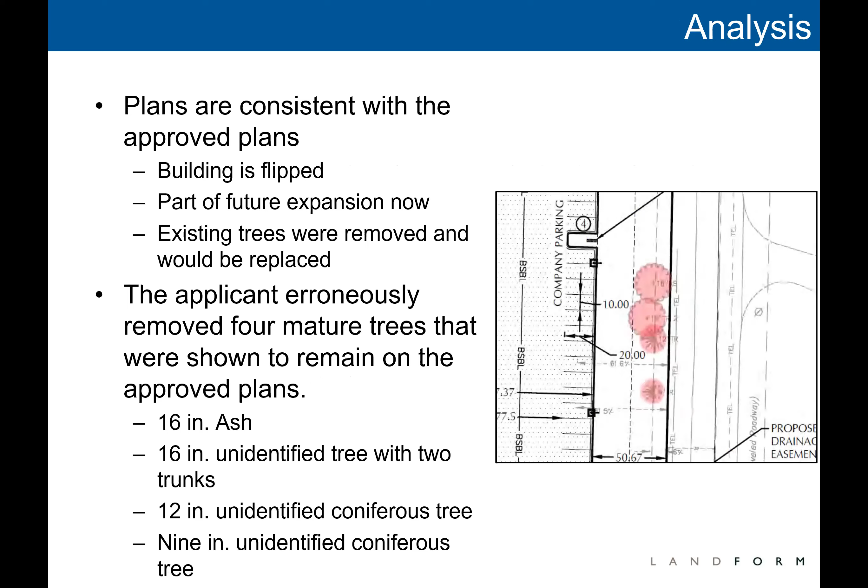I think they were significant enough — this is the old photo. Not all of these trees were supposed to be preserved, but 4 of them were, and you can see they're good sized trees that would provide some immediate screening. The applicant acknowledges that their contractor did remove the trees. We think it's important to replace those trees.

I spoke with one of the registered landscape architects on my staff about how to best do that. You simply can't bring in a tree that size and think it'll live — they don't do well that size. So we thought we should increase the number of trees, but still do bigger trees than we would typically require as part of a landscape plan.

In the original plans, the trees were planted pretty closely together along 101 already in the new proposal. So we suggest for the council to consider that some of the trees on 101 be moved to the north and west side of the building where these existing trees were removed and new trees will be planted. We would not lose any trees overall — all the landscaping originally approved would still be required, plus 6 additional larger trees and some additional shrubbery along 101.

We're pretty specific in our ordinance about how big those trees are and the spade needed to plant them — a 92-inch tree spade — so that they don't chintz out on getting the hole big enough and getting the trees in a way that they'll survive. That's a real trick when you're spading in bigger trees; sometimes they just don't do well. So we tried to be pretty specific.

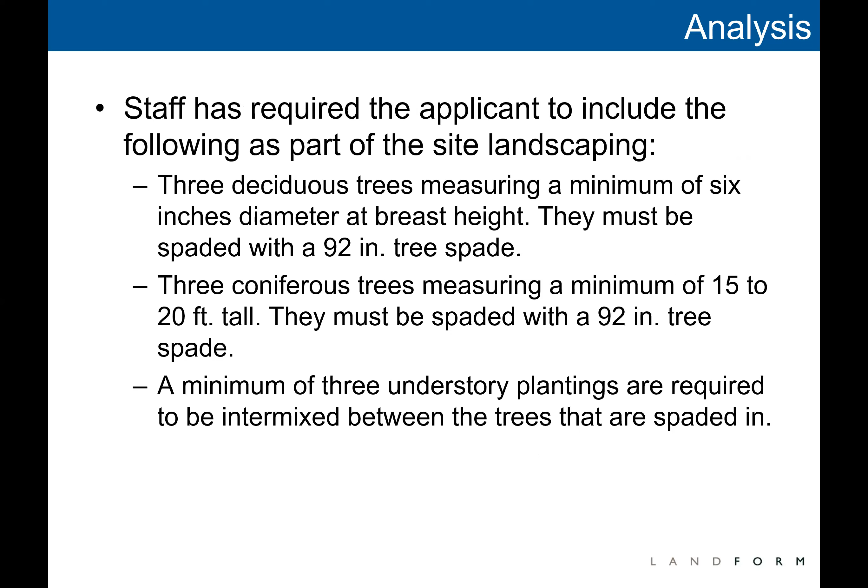And so we want to give them room to thrive and grow, and eventually we'll provide screening more closely relating to what was removed. So certainly the council can talk about that. We think that's a good solution to provide replacement trees as well as give them room to grow and provide a little more screening on the north and the west. So certainly open to modifications from the council, but that is our recommendation.

We do recommend approval of the site plan amendment, which is a 3,000 square foot addition to the approved building, flipping the building to put the retail on the north end, and then correcting the landscape situation. Happy to answer any questions.

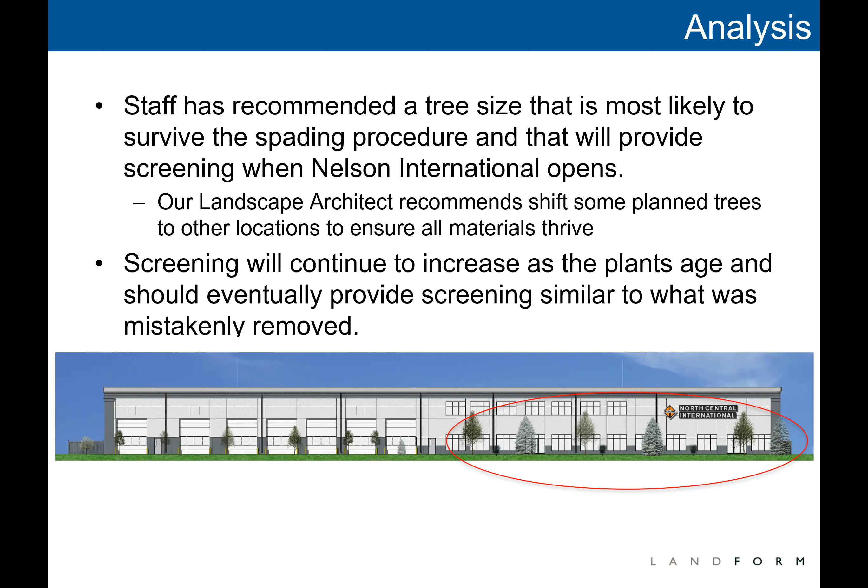And how about the screening to the south? I know there's a lot mentioned about the north and west and moving some trees over there. What is in the plans currently in terms of screening, because the majority of the houses are to the south and to the west of the surrounding properties.

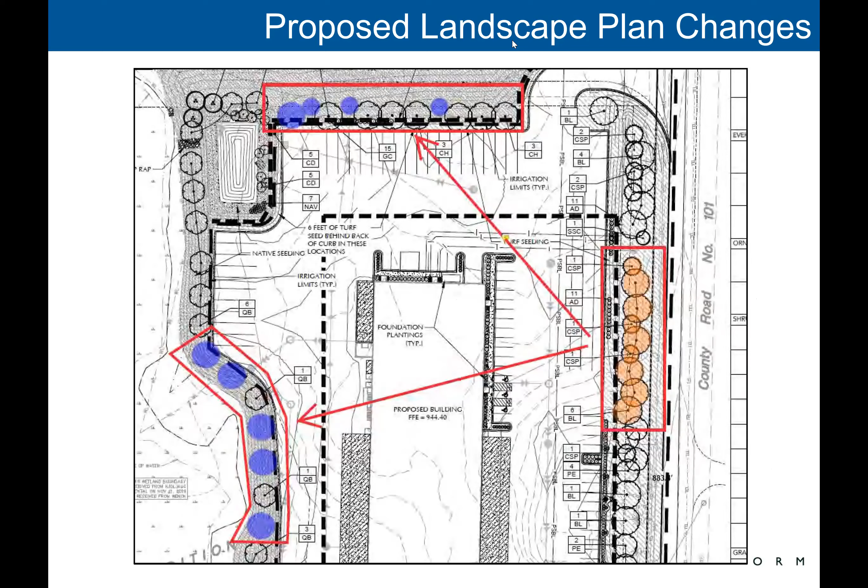Yeah, the approved landscape plan - I'm going to stop my screen share and pull that up for you here quickly. Just appreciate it, get to the screen. Here we go, and share the screen.

While you're working, Kendra, is the orientation of the building actually rotating? Like, is the long axis pointed in another direction, or is it just the design of the building that's changed within the existing shape orientation?

The shape orientation is staying the same, it's just flipping north to south. So this retail space was down here, but it remains this more vertical orientation.

This landscape plan is the approved landscape plan, it doesn't reflect some of our changes where we said we think maybe move some of those trees. So along the south, we do have a city trunk infrastructure line, so we're balancing that with the landscaping, but we do have a row of 7 trees along the south property line there.

Okay, in terms of the parking lot, does that change at all with this new plan? Well, it did change because the perimeter parking remains the same, but what changed is the parking was always in front of the retail. So when the retail component was here, this parking here was down here.

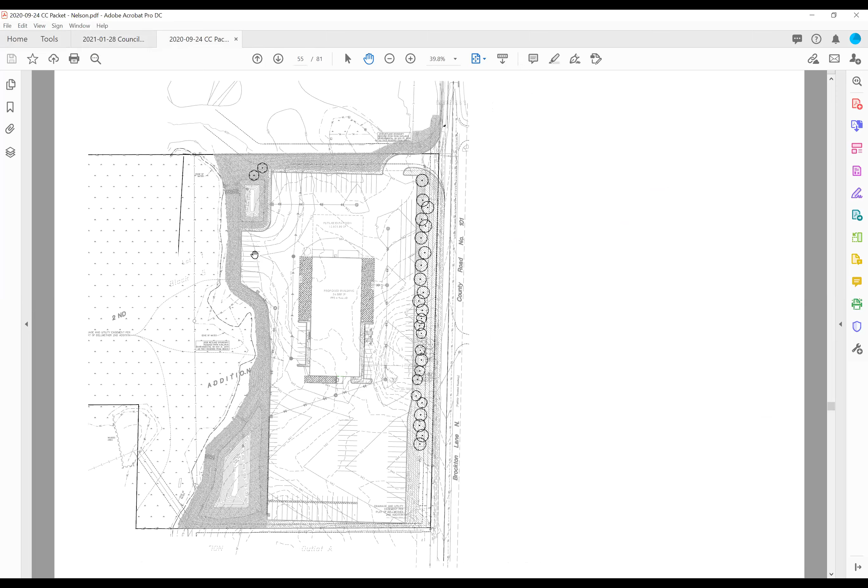If you look at the new north line of the building proposed right here, that extended out here. So the addition really did tend to come out to this end where the addition was planned. But you're correct, the future addition on the south that they're showing moves the south building line from this point slightly further south. The difference between this basically stayed the same, and they added on to the north, and the future expansion now would be on the south. So it would creep closer, the building wall, to the south.

And this, just as a note, this isn't Bellwether. This is a commercial lot for Bellwether. The residential is over here, these are residential lots in Bellwether over here. But yes, you're correct, the change to the expansion would ultimately, if built, bring the building closer to the south lot line.

Gotcha, and a couple of the parking stalls got added in this area. I apologize, I would have to highlight these and match them up to see exactly, but I can see that some of the stalls happened in this area. Is the applicant on? Can he talk about it?

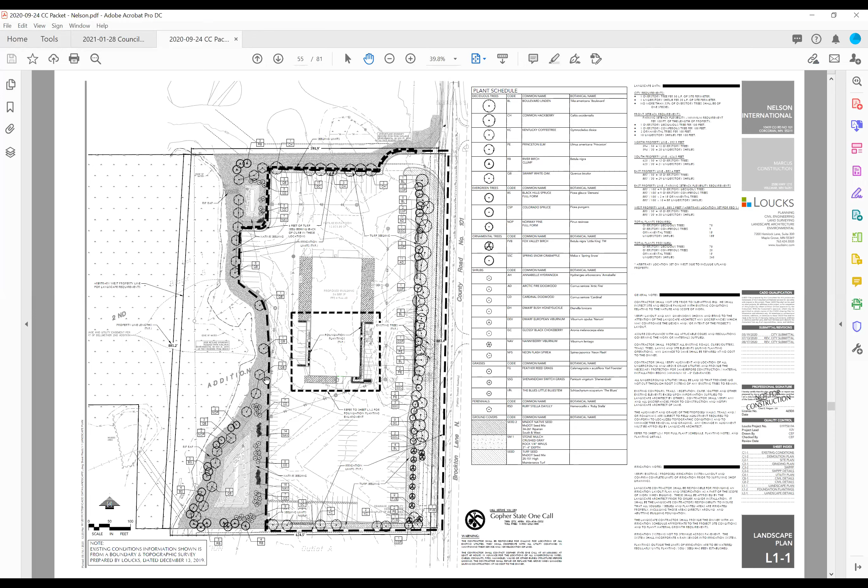Okay, Mr. Mayor and council members, this is Ryan Nelson. We're at Marcus here with a couple of people involved with the project. We're a little confused about the parking stall thing because we really didn't add much for stalls, except maybe a couple around the building that we're aware of. So we don't feel we added much.

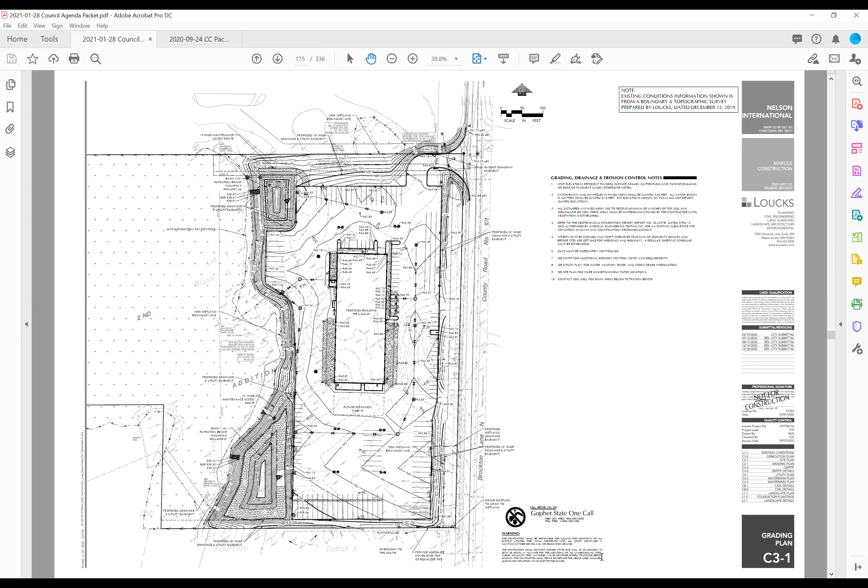Around the perimeter is the same, and we actually lost a little bit on the west side, kind of towards the northwest by the pond. We lost a couple in that corner, but that's truck parking stalls. There might be a few more automotive stalls, but that's what we added there.

And since we're on, if you guys have any other questions about why we flipped the building — we desired to do that because of traffic flow on the site. Once we found out what our driveway entrance and our future driveway entrance will look like, we decided it would flow better with the building switched around.

Once we switched the building around, it was more difficult to add on to the parts storage side of the building. So we decided to expand the size a little bit to make the parts warehouse larger now, knowing that in the future there's probably no option to add on to that area. So that was kind of the main driver with the changes we're asking for.

So did you add an actual showroom too? Yeah, we made the showroom larger. Okay, there's always been a showroom though. There's always been one, we just made it larger, and the inside layout of the building has changed a fair amount on the retail end of it.

Yeah, I didn't remember the showroom with the door on the outside. I'm assuming that's to bring a truck in for show. Yes, that's to bring a vehicle in, because once we switched it around, we were going to have this fairly large empty space. We thought, can we add a door and put a vehicle inside? And that was what we were able to accommodate.

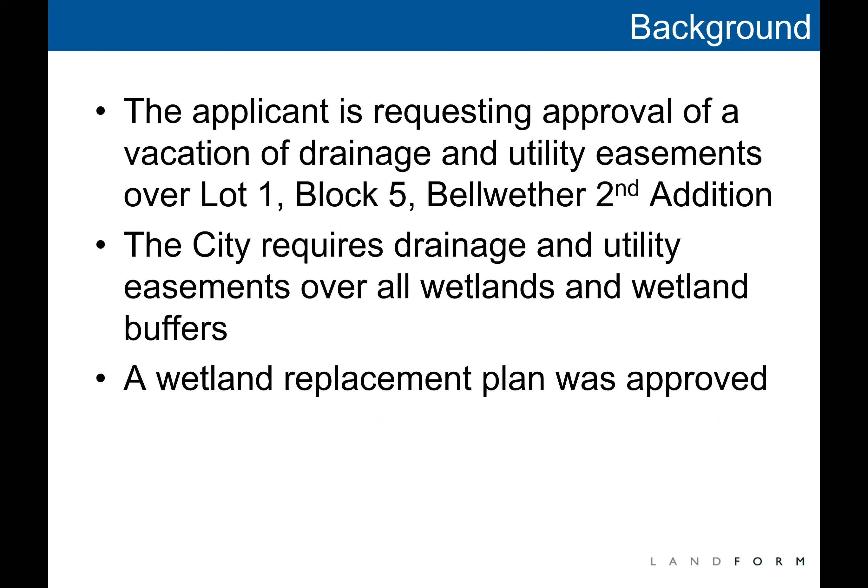To vacate the drainage and utility easement on the back half of lot 1, block 5, Bellwether Second. We always require wetland, drainage and utility easements over wetlands. As part of this project, this large wetland here, which had a drainage and utility easement deeded with Bellwether, the applicant was able to modify the eastern boundary of that wetland.

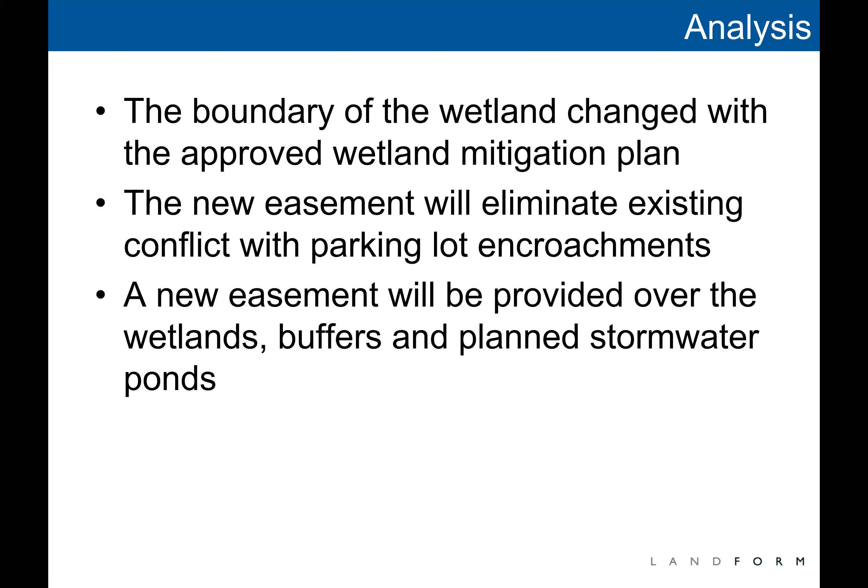And so we had requested that they vacate that easement so that there wasn't an encroachment of the parking lot into the easement. So this is the existing easement, and there was a tiny bit right here that they were authorized to fill and build the parking lot over.

So we would vacate this easement that was deeded with Bellwether and get this new larger easement as part of this plat, which would cover the edge of the wetland boundary and the stormwater ponds in these two locations. So that would be part of the site plan approval, that was a contingency on the resolution you just approved.

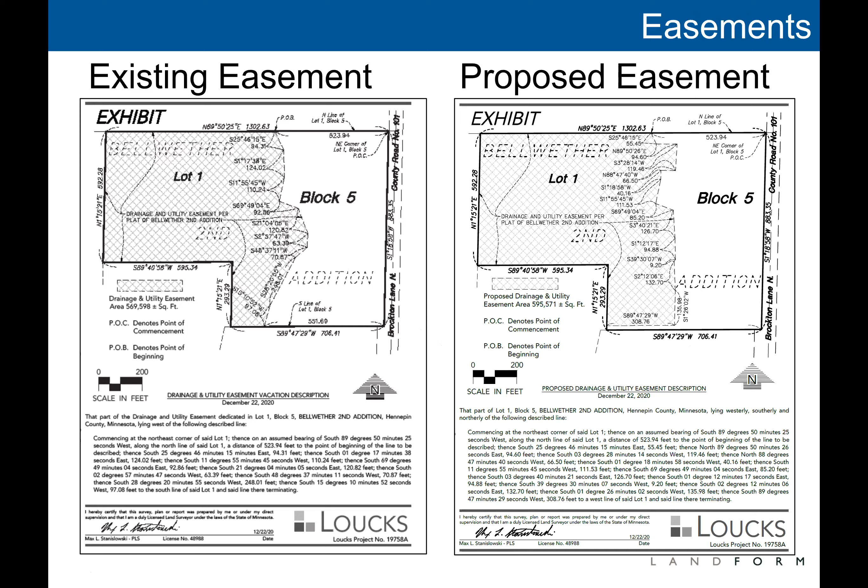But again, approval of an easement vacation requires a four-fifths vote. So tonight we would just ask that you open the public hearing and then continue it to a date certain for this item.

Thank you, Kendra. So yeah, we will open the public hearing, and Jessica, if anyone wants to speak, raise your hand or press star 9, and Jessica will acknowledge you. Thank you, Mayor. No one is raising their hand at the moment, but we could give them a moment. Sure, let's give it a few more seconds.

Mayor and Council, just looking at the upcoming agendas, I would recommend the February 11th meeting. The February 25th meeting is pretty jam-packed, although it should be a quick item, but one less item. Sounds good, and do you just need a motion on that to push it out to that meeting? If we could get a motion, that'd be great. All right, I'll entertain a motion to continue and table this till the February 11th meeting.

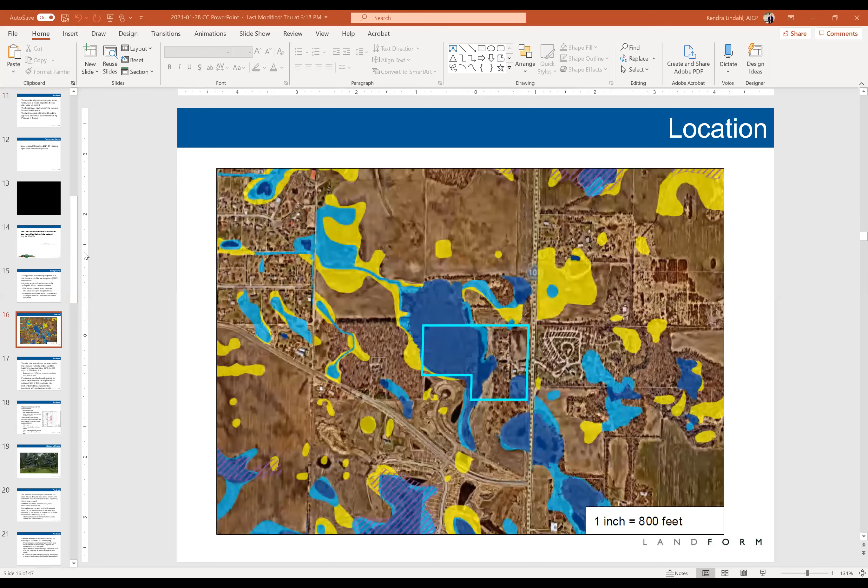Then we will move on to item 8B. I'm sorry, that is what we just did. One second here, I apologize, I have my notes backwards.

Item 8C, which is the PUD sketch plan review for the Van Blaricom and Schober properties.

Thank you, Mr. Mayor. This is an opportunity requested by the applicant to solicit informal comments on a PUD sketch plan. The comments tonight are non-binding, but are really important for the applicant to be able to make decisions about investments. The PUD sketch plan is for 193 single-family homes.

121 of those units would be an extension and infill of the Bellwether development, which is villa homes with association maintenance. The western 72 units would be new single-family housing not part of the Bellwether project. On the screen is the Van Blaricom property, and the Schober property is surrounded by the Bellwether project, south of Stieg Road.

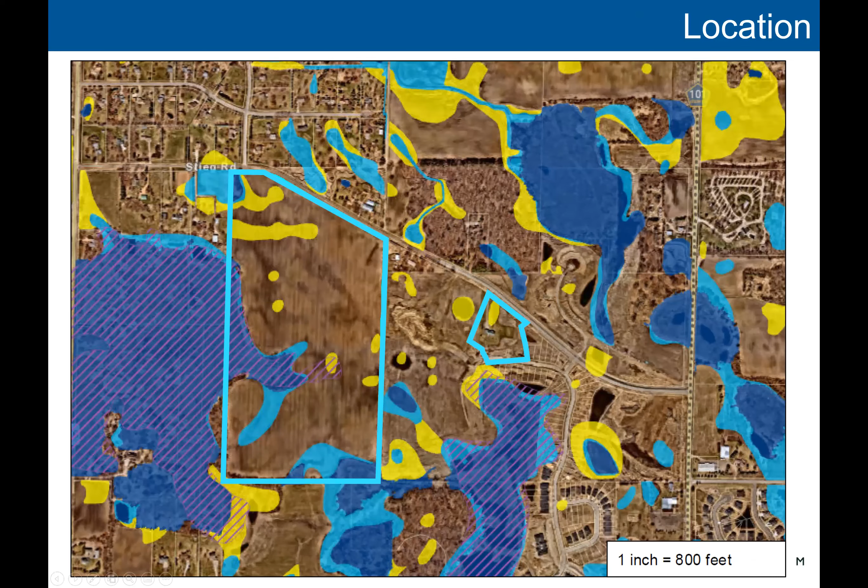The concept would expand the Bellwether project. An EAW was performed when the Bellwether project was proposed back in 2018. The Environmental Quality Board state rules have thresholds for mandatory EAWs, and Bellwether did meet that threshold. The new project does not meet the threshold for a new EAW, and when combined with the existing Bellwether, does not meet the threshold for a new EIS.

As I said in the staff report, I worked with our city engineer to review the rules, which guidance is not crystal clear on the process. I did speak to EQB staff who noted that the city is the RGU and has broad discretion in how to proceed. Our recommendation remains as outlined in the staff report.

This does not trigger an EAW, but we do recommend that as part of the feasibility study required to review infrastructure improvements, we do a memo, as we've done on other projects for similar situations, to review this new portion of the project against the adopted EAW, meaning permits identified as required in the EAW. We would measure against this project and apply the same mitigation strategies. I have reviewed this with the EQB who has no objection to that approach.

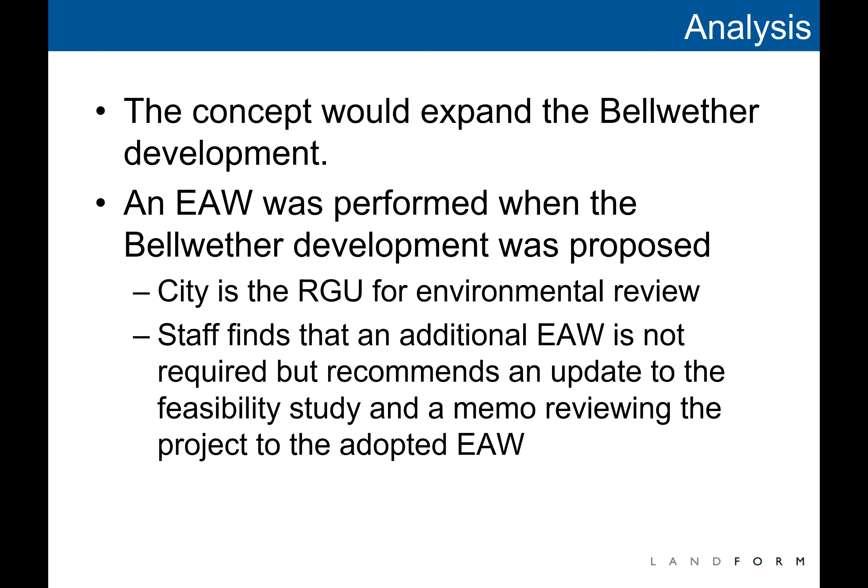And the rules, they've noted that the rules should provide a bit more guidance when they update the rules next time. This exhibit shows the new concept. Here are some new villa homes on the Schober property, which would tie in. This is the entrance off of existing entrance off of Stieg.

So this is a new villas here. The road would be extended and continue around the park with these villa units. On the northwest, there are the 72 single family homes that are not connected to the project, and Pulte is intentional about that.

These folks in the villas have association maintenance. They're part of the clubhouse. These would be a different single family neighborhood, not paying association dues and being part of that association.

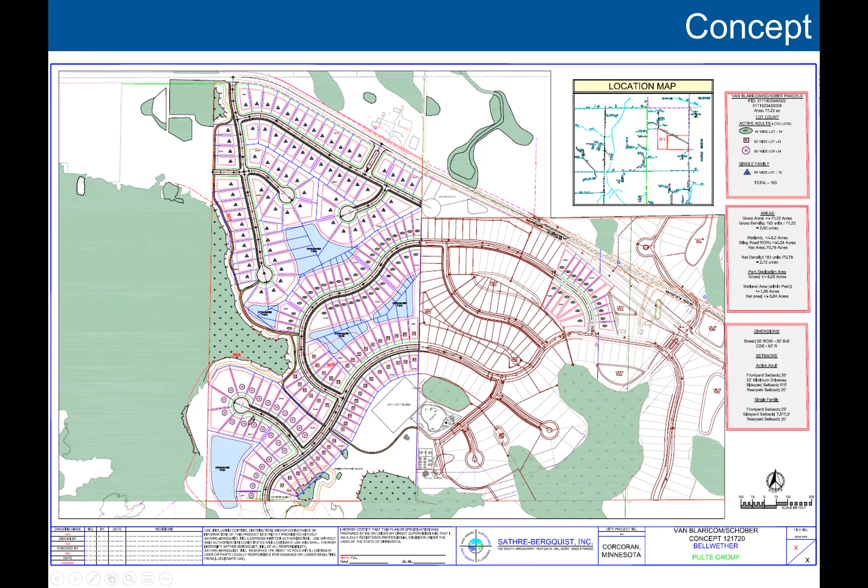Their concept would be to rezone the villa portion that's going to be an extension of Bellwether as PUD, subject to all the Bellwether PUD standards, and then rezone the single family to RSF3, which is 7,500 square foot minimum lot size with 65-foot lots. At this point, they do not believe they need a PUD for their single family and would follow straight zoning standards for that portion of the project.

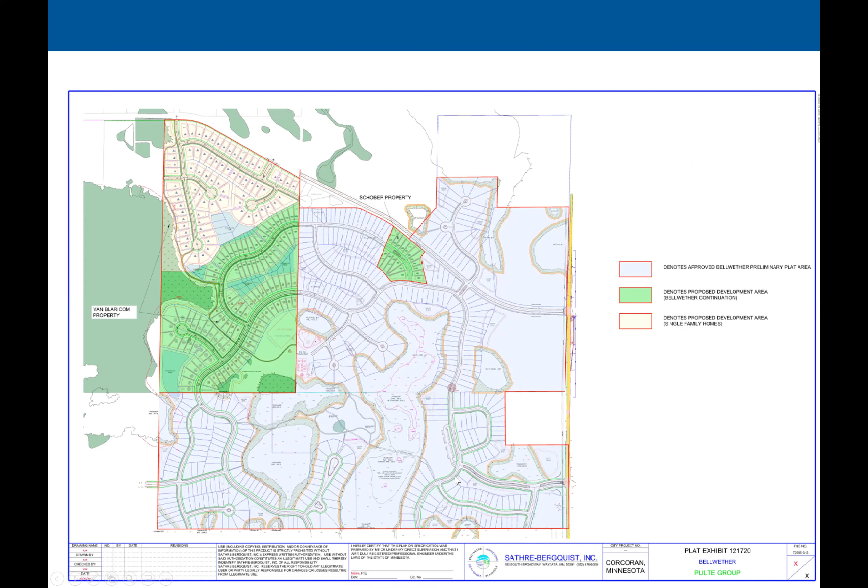The villa homes will follow the same architectural standards as Bellwether if it proceeds. The single family homes are more traditional single family homes, slightly larger. We have not reviewed this for compliance with our ordinance standards, but generally appear to be consistent with the standard zoning requirements.

One of the issues that needs to be resolved for this project is when Bellwether was approved, we needed to reach agreement with Maple Grove for them to provide water to the site. The agreement with Maple Grove as it exists approved water service for the Bellwether project that has already been approved. So we would need to amend that agreement with Maple Grove in order to expand that water service to serve these properties. Pulte has been speaking with Maple Grove, as has city staff, and the city of Maple Grove has indicated a willingness to work towards expanding that agreement.

Additionally, what's new since 2018 is the city has been moving forward with the new well studies. A new well site has been identified on the Lother property, and this park in this project has been identified as a potential well or water tower site to serve Northeast Corcoran.

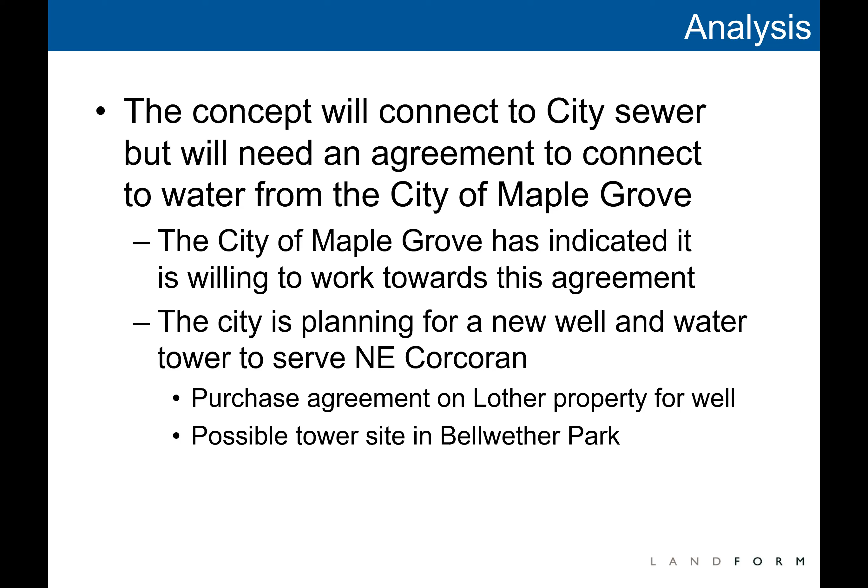The access, as I mentioned, there are 2 access points currently shown onto Stieg Road for this new development, one on the west end and one sort of on the east side of the project. As part of the feasibility study, Public Works recommends that we look at making this a temporary access and planning the ultimate access point at 1/4 mile spacing between this proposed road and this existing road. So somewhere in here. This property is not part of the project, is not controlled by Pulte. But if we plan for a road to extend here, that would allow an alignment should the Stieg property on the north side ever develop in the future. And so we wanted to highlight that for council and for the applicant's knowledge that we'd want to look at that in the feasibility study.

Additionally, Public Works would like to look at eliminating these cul-de-sacs and making that a through connection, just making it easier for long-term maintenance.

Isn't that one cul-de-sac long for emergency vehicles? I thought we liked shorter. Because of this turnaround and the fact that it has a cul-de-sac turnaround, public safety was fine with this. Because we have 2 ways in to the site, they certainly support the Public Works request to connect these 2. But they were comfortable with that extension, and certainly in part, I suspect it's due to this regional trail that winds through here that also can serve as emergency access if needed. But they were fine with that. They did not have any comments on this concept plan beyond the Public Works comments.

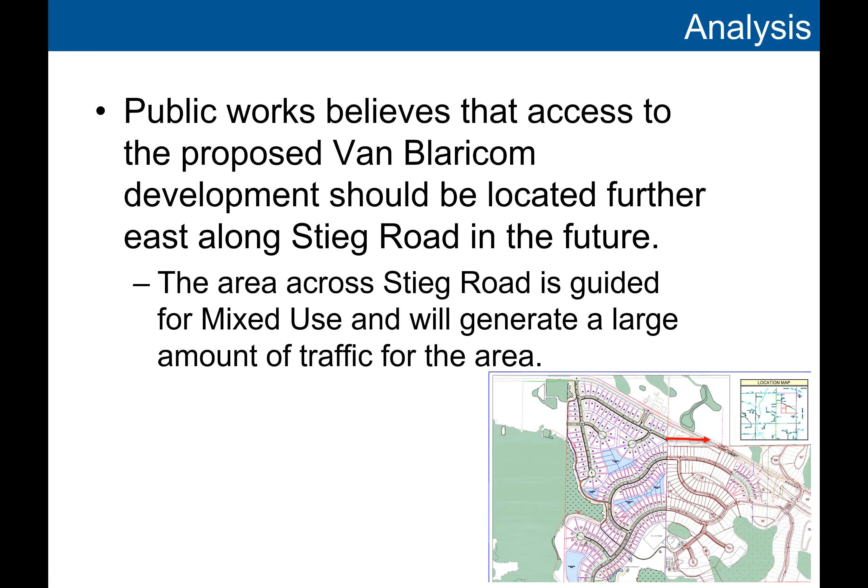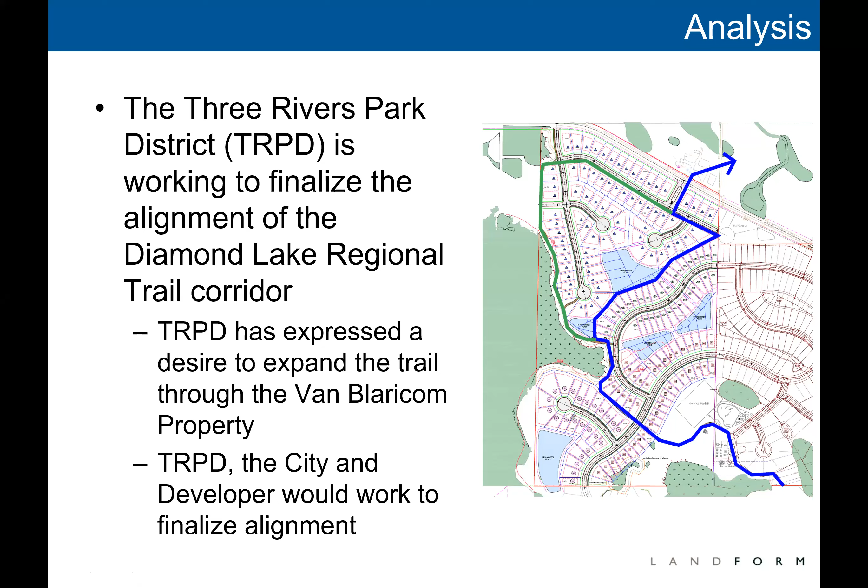As I mentioned, the trail, Three Rivers Park District, as you know, is continuing to work on finalizing the Diamond Lake Regional Trail Corridor alignment. Brad and staff met with Three Rivers to talk about some alternatives, and so we would continue to work with them and the developer to finalize the alignment. Our trail plan shows the trail coming up here and then extending up Robert Street, all the way up to Rogers. I think the Three Rivers trail suggests that it comes through the Stieg property and on the west side of that large wetland complex. So something that we all just want to be aware of and that we would continue to work through if the project moved forward.

As I said, with the original Bellwether, we had a master parks plan. They dedicated significant parkland for the open space park and have already deeded the land for a portion of this neighborhood park. The original plan showed this concept, which had this parkland border. There was a wider access into the park here off this new public street than is currently shown now. Staff and the Parks Commission have talked about this being an entrance into a small parking lot. This is a neighborhood park, but this is a big neighborhood, and the neighborhood park will serve people outside of the Bellwether development as well. So we want to make the park welcoming, not closed off from the public.

If we eliminate a few of the lots here, we can open up the park to a view shed and allow a small parking lot, which has yet to be designed, allowing more access. We'd like to continue working with them to eliminate some of these lots for a larger park entrance. In general, the park plan is generally consistent with the dedication anticipated as part of the original Bellwether approvals. I'll also note this is a search site for a potential city water tower, and as we move forward we want to look at how that might impact homes and how Pulte decides to lay out the site.

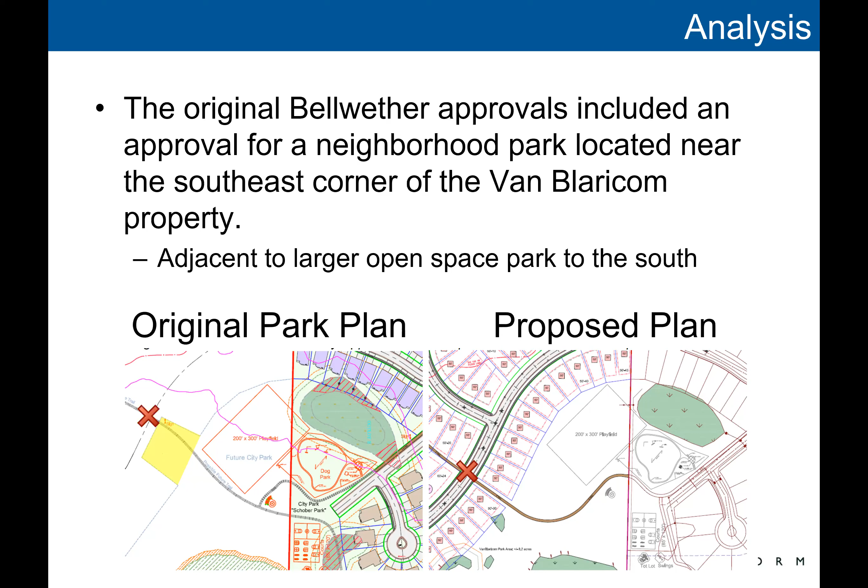So again, that was a high-level review. There's more information in your packet from the applicant and from me.

Next steps would be if the council was supportive, the city would work with the applicant to complete a feasibility study and an EAW review. Then the applicant could proceed with the formal applications. The first set would be a zoning map amendment, the preliminary plat, and for the Villa portion, the preliminary PUD development plan approval. As proposed, the single family homes section does not require a PUD and would be straight zoning, just a preliminary plat. Then for the villa portions, the applicant would submit a final plat and PUD development plan, and for the single family, just a final plat application.

I'd be happy to answer more questions. The applicant is online as well, but the purpose of the concept plan is for the council to provide direction to the applicant. Any comments you give them are advisory only and non-binding, but certainly are important as they prepare their formal submittal. So with that, Mr. Mayor, Council, I'd be happy to answer any questions.

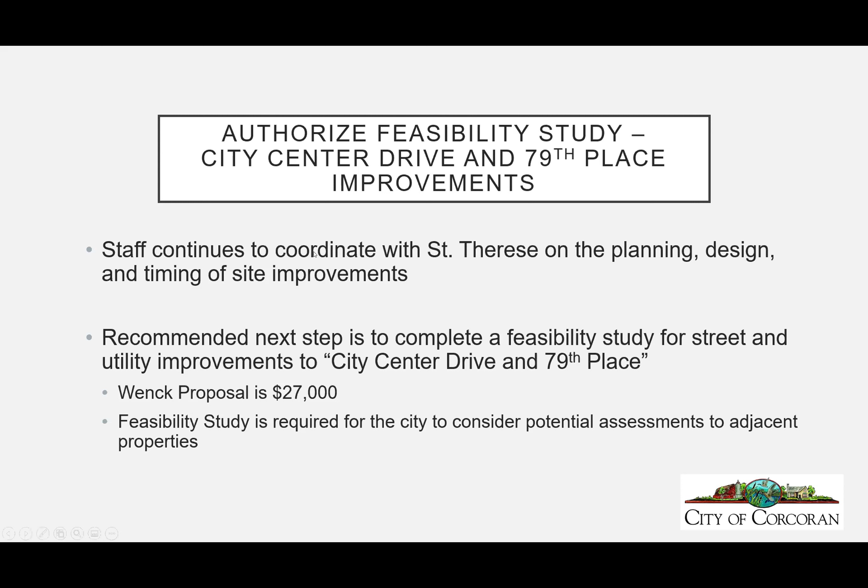I believe we have some schematics. These are out of an original feasibility study completed for St. Therese a couple of years ago, which shows the connection of City Center Drive, the current south driveway location just south of the Corcoran Police Department. That would be the main full future intersection, potentially with a signal in the future. City Center Drive arches down to the southeast, and at the very bottom of that schematic is 79th Place, which would likely be a right in, right out. So the street improvements would include turn lanes off of County Road 116 and the construction of those roads, along with associated stormwater ponding, and some analysis on trunk water and trunk sewer.

The St. Therese schematic is old and outdated, and it's most likely to change. The goal was to emphasize the road alignments we are going to focus on. The schematic on the right is from the Southeast District Guidelines, showing the vision for the corridor that will be analyzed through the feasibility study, for those who aren't familiar with it. Next slide, Jess.

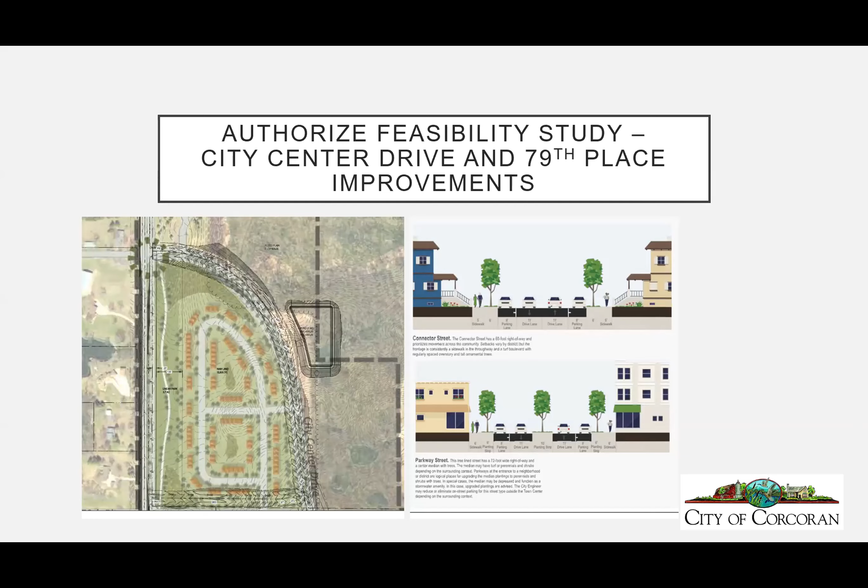I think you went a couple too far.

Financing of this project is likely through a combination of sources. We don't know the final percentages, but we're planning to lean heavily on municipal state aid funding, special assessments, and there will likely be some local participation. So tonight we are looking to consider a motion to approve the proposal from Wenck and authorize the Public Works Director to approve any optional services needed. That's really to streamline the process. We want to design this project concurrently with the developer to realize cost effectiveness. It just makes a lot of sense. We want to position ourselves tonight so we can react to their needs, and we feel this is an appropriate time for that authorization from you guys.

With that, I'd be happy to answer any specific questions you have related to the scope or the project itself.

Sounds good. Thank you. Alan or Jeremy, do you have anything you want to start off with? Since the project is new to me, thank you for the background, Kevin.

Are there any trails as part of this concept? Or is that separate? I know we talked about having a linear park along 116, and you showed that in your diagram, but that's not part of what's being studied, is that right? This is just the road alignment and how that would lay out?

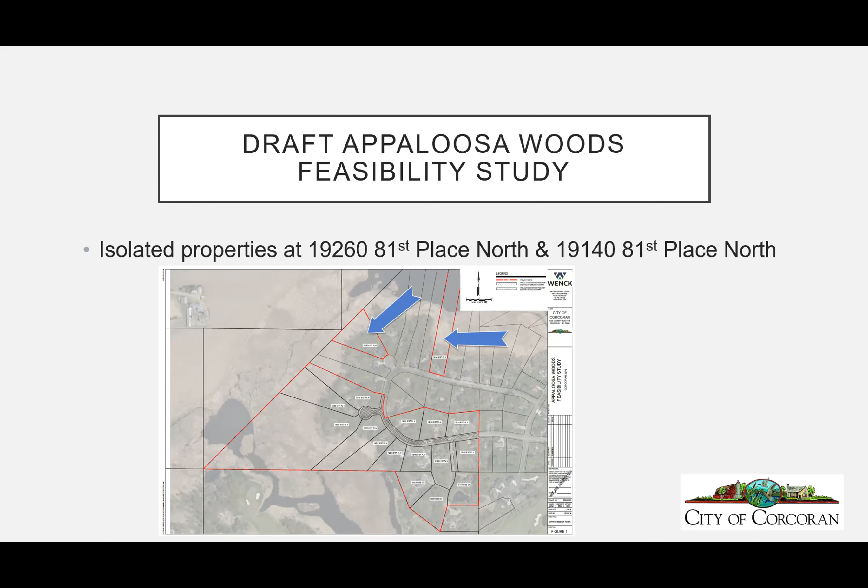Next slide, Jess. So we have treated them as 2 of the 17. We included those 2 properties and grouped them into this neighborhood of 17 residents, so they are included just like all the other ones in this report. They are a pavement to pavement assessment capped at 7,200.

Like Councilmember Nichols brought up, Maple Grove is planning a street improvement project for the neighborhood completely surrounding it in 2021, and we would like some direction on potentially pursuing some sort of cost share agreement with Maple Grove that would basically incorporate our project into theirs.

Their project is huge, we would realize some cost savings, something like we maybe bid our project as an alternative, so we could clearly delineate who was paying for what, and some of the other costs kind of on a prorated basis. But we would like to at least work towards a preliminary agreement with them before we finalize this feasibility report.

So some guidance there and support for having a cooperative project, and likely due to their project being larger, they would lead it and we would compensate them back for it, is the vision I would see. Staff recommends this, we believe we'd see fairly significant cost savings, and that was kind of incorporated into this draft feasibility.

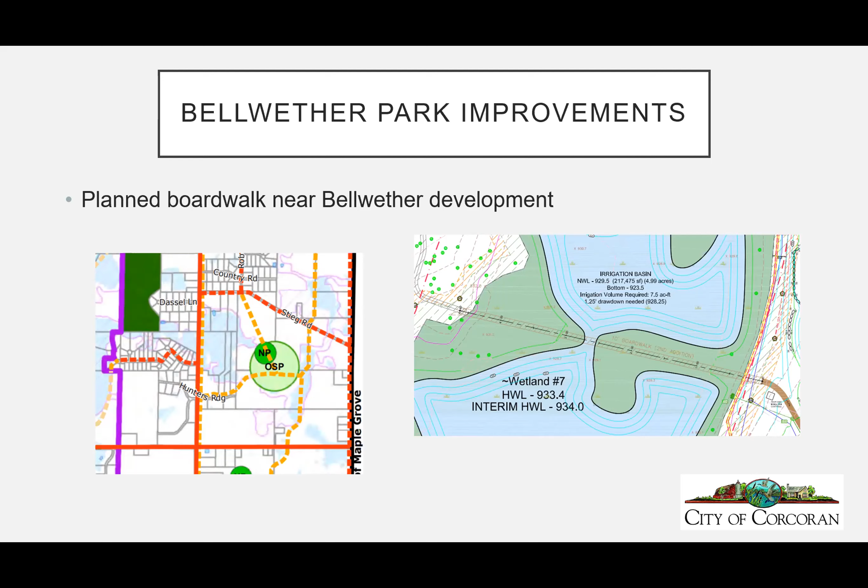This is a planned boardwalk near the Bellwether development. The left side of the slide shows the open space park, neighborhood park, and the east-west connection through that wetland area, which was a planned connection well before Bellwether came. On the right-hand side is a draft design of the boardwalk connecting the open space park to the neighborhood. Next slide, please.

Really brief here. So the Parks and Trails Commission has discussed this initial design for a couple of years now, off and on, talking about what a boardwalk design should look like—have railings, not have railings—and we're to the point of moving forward.

So more recently, the Parks and Trails Commission was asked: okay, we know everything we need to know, there's lots of demands in the city for parks and trails, we know that the open space park isn't entirely designed yet and homes still need to be constructed around it. So with that knowledge, do you want to move forward with this project in 2021, or do you want to defer it to future years? And it was unanimous that they felt it was important to get moving on this boardwalk project sooner rather than later.

We estimate the cost to be around $350,000 to $450,000. Most of that will be part of a developer contribution, as part of their park dedication contribution, and there's an overall cap. So at some point they hit the cap, and then the city needs to fund things beyond that. We believe there is a possible city contribution of between $100,000 and $200,000 beyond what the developer will pay for. With that, we do have a park dedication fund with a balance of over $800,000.

At that time, I did note on the report there's not a shortfall of places to spend that money — City Park, Ravinia Open Space Park, the Open Space Park and Neighborhood Park in Bellwether, potentially Town Square Park, and trails along County Road. So there's a lot of need for what appears to be a big chunk of money. But when you figure a boardwalk can take care of half of that, it's not that much actually. So really looking forward to the council.

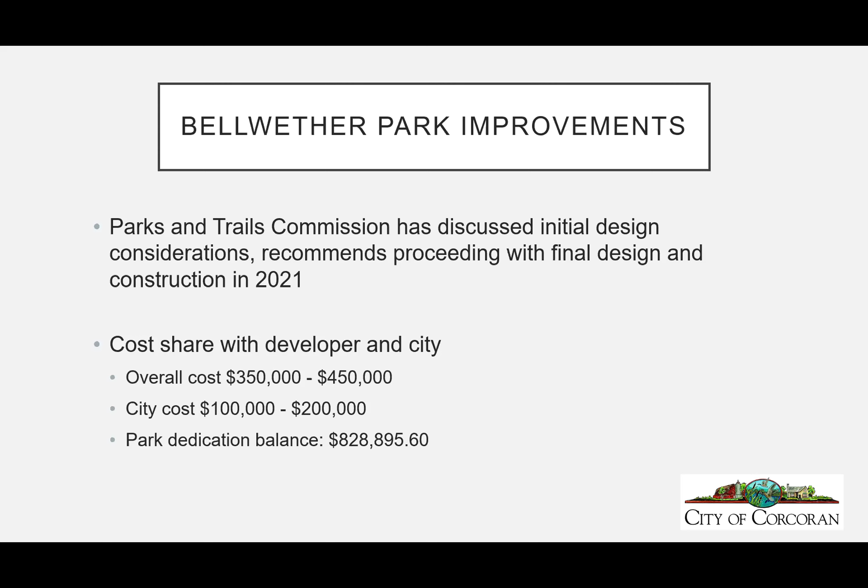Next slide please, Jessica, and the last slide. If you agree with the Parks and Trails Commission to direct staff to begin design work for the boardwalk, including getting quotes, and then direct the Parks and Trails Commission to review those quotes and make a recommendation to the council. On top of that, Jessica Christensen Buck has been looking into potential grant opportunities, and we'd also like authorization to seek and apply for grant funds to reduce those costs if possible. So those are the action items — if you agree with Parks and Trails Commission on the use of those funds for 2021, and approving us to hopefully not use them.

All right, I would tend to agree with the Parks and Trails Commission's recommendation to go forward with this.

Like you said, there's no shortage of good parks and places to use some of that money, but I think this is, from what I've seen, a really nice option.

Can I ask a question, Mr. Mayor? How does this align with the Three Rivers Diamond Lake Trail? Is there any potential that this could be incorporated into their program and maybe get some funding from that?

Not this one, great question. This would be a local connection that would essentially get to their trail. So they want to put their trail to hit our open space park. They have no desire to head out this way through a neighborhood to a county road. So they really want to stick and go kind of north, like we talked about with the Pulte concept plan tonight.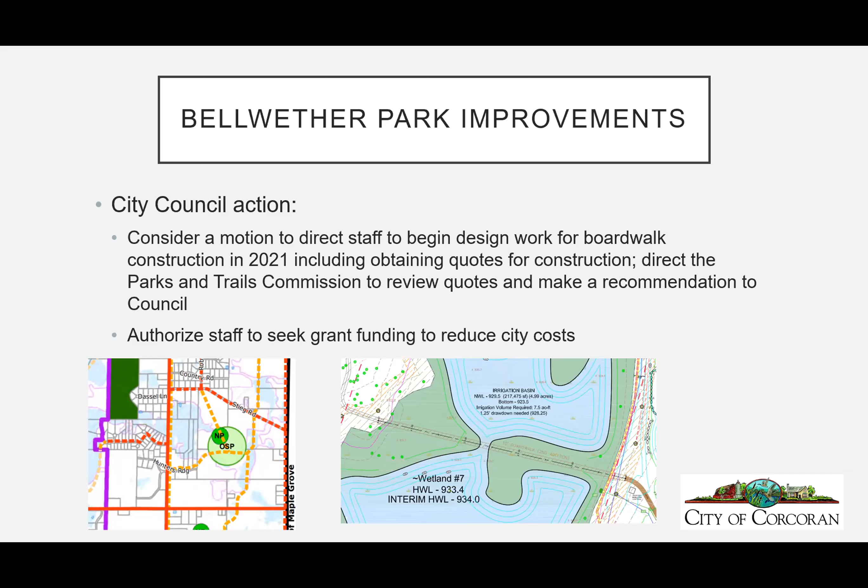10D, 2021 legislative priorities. Brad: Thanks Mayor and Council. Next slide, Jessica. So typically the City Council does adopt legislative priorities each year for the session. The session did already start on January 4th, but knowing a new council was coming on, I kind of held it back until more recently.